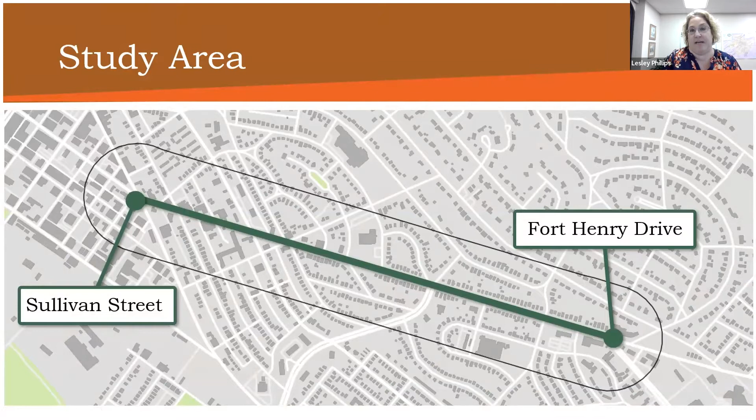For the key findings, the project team spent a considerable amount of time and effort to better understand East Center Street and some of its needs. Here are some of the key findings.

The traffic data also shows that actual vehicle speeds exceed the posted speed limit even during rush hour. Along this corridor, TDOT does an annual count at one location, just collecting traffic counts. But the City of Kingsport went out at the beginning of this study after school was back in session, to make sure we captured accurate data, and they did counts at 3 locations: on the 4-lane section, in front of the Renaissance Center, and the 2-lane section at Dale Street. The City of Kingsport counts go for a whole week, collecting speed, type of vehicle, and a lot more data.

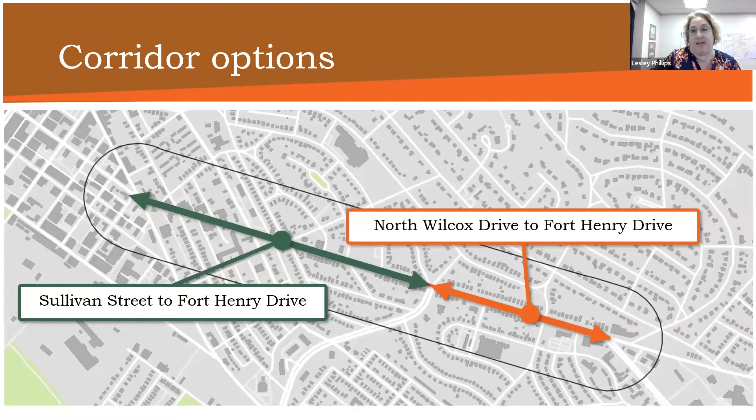So the corridor options. Listening to what you told us, what we saw in the data, and our own observations, the project team developed several different ideas for addressing the issues and opportunities on East Center Street. Originally the plan was for the consultant to give us 3 scenarios for the whole corridor from Sullivan Street to Fort Henry. When we got out here doing the site visit, they quickly saw how different the sections operate, so it was their idea to give us options on 2 different sections that the city can mix and match if they choose.

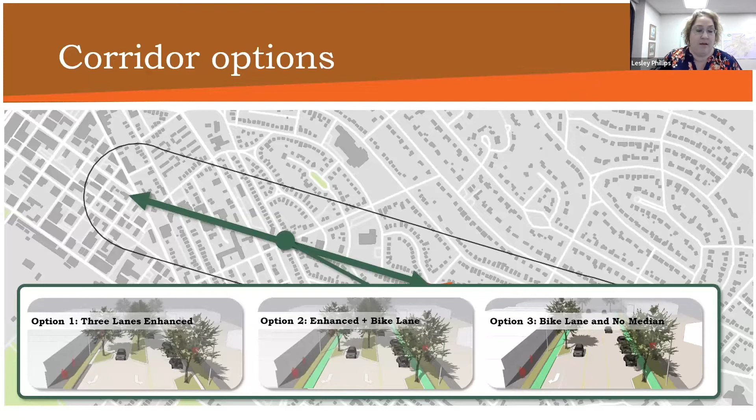So they provided options for East Center Street from Sullivan Street to Wilcox Drive, which we also call west of Wilcox. And then also from Wilcox to Fort Henry, or what we call east of Wilcox.

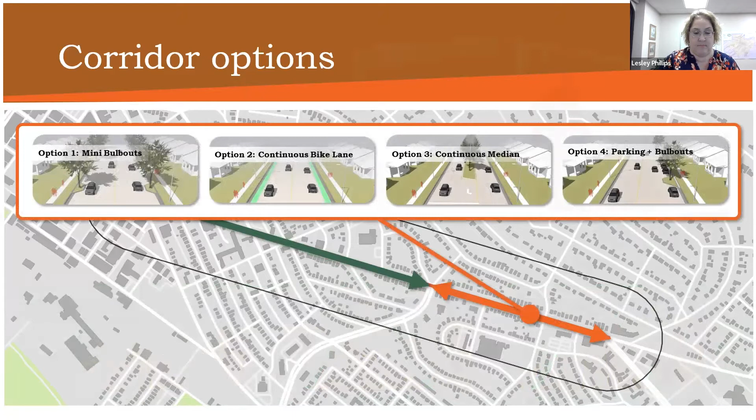In November, we held an open house at the Renaissance Center to share the ideas and get your feedback. We also posted the ideas to the project website and collected responses in an online survey.

Through conversations, map comments, and the survey, you provided a lot of great feedback on our proposed ideas. Here are some of the ideas that stood out the most.

Landscaping and beautification. By far, the greatest amount of positive feedback received on the proposed ideas came from improved landscaping and beautification. Residents who took the survey said they liked ideas that provided plenty of opportunities for trees, landscaping, signage, and other ways to improve the appearance of East Center Street.

On-street parking. Many residents said they liked on-street parking and chose proposed ideas that kept existing on-street parking intact.

Medians and bulb outs. Many of you said you like the medians and bulb outs because of the opportunities they provide for landscaping and traffic calming.

And the bicycle lane, we hear a lot about that. A lot of people make jokes and negative comments, but actually many residents said that they like the existing bike lanes on East Center Street and want future designs to keep them.

So in just a minute, we'll take a look at the preferred vision and recommendations. But first, quick reminder, use the Q&A button to submit your questions while they're fresh on your mind.

And now I'd like to ask Kevin Tilbury from Kimley Horn to join me to share the recommended vision for East Center Street.

Thanks, Lesley, and I'd echo my appreciation of you joining us today. Thanks for your time. We're excited to share the fruits of your labor and sort of helping us create a vision for Center Street.

So we developed the options. We went out and presented them to you. We got your feedback, and this is the recommended plan based on what you told us.

A couple of points I'd like to make about the vision: there are three things we really tried to do. As Lesley mentioned, the consistent feedback we got from everyone is let's make Center Street a more attractive place. It's one of our important gateways into the city, and let's make it look really nice. So we tried to create plenty of opportunities for landscaping and for placemaking, so if someone wanted to have a cafe with outdoor seating, or a place to gather, or opportunities for trees, all that sort of thing.

As Lesley mentioned, our data and analysis showed there's a bit of a speeding issue, just because of the way the road is designed. So we tried to make recommendations that would encourage more appropriate motor vehicle speeds consistent with the posted speed limit. There's also a lot of pedestrian activity in the corridor, and we wanted to create a more pleasant, comfortable, and safe experience whether you're driving, walking, or riding a bike. We want to make it a nice place for you to be, which would hopefully become a place for investment, with more development and businesses coming into the area.

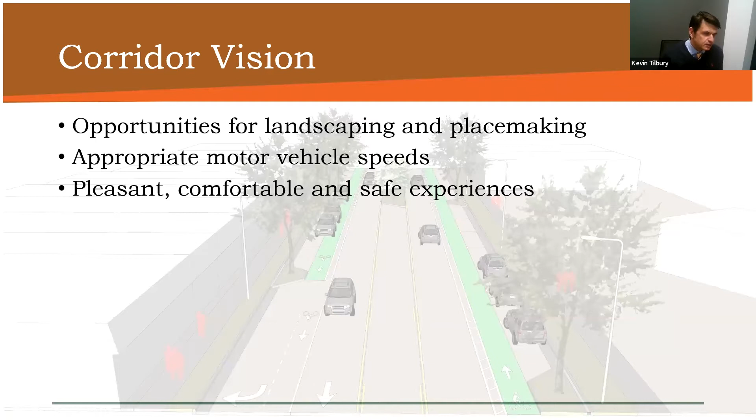So with that, let's dive in and show a little more detail. As Lesley mentioned, we looked at different options for either side of North Wilcox Drive on East Center Street. This is the section from downtown heading east to North Wilcox Drive.

Right now that's currently what we call a 3-lane road, with one travel lane in each direction and a center turn lane. Our vision does not change that. It keeps that same general configuration but adds several enhancements.

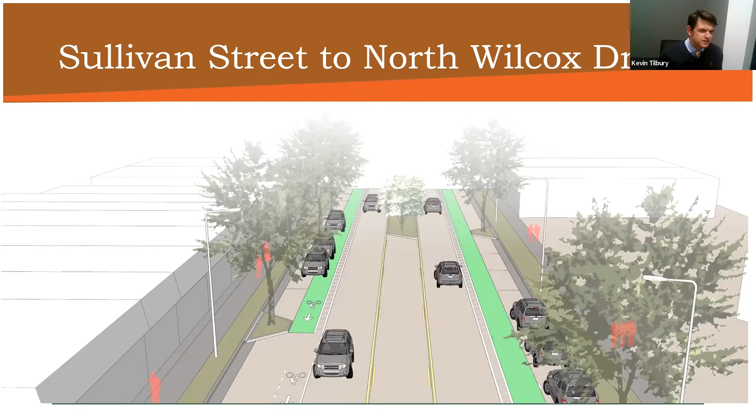So a couple of things are that we installed medians or traffic islands in that center turn lane, which has several benefits we'll get to in a minute.

We also, where there's currently on-street parking, didn't take away the parking, but in certain strategic locations we put bulb outs, which jut out into the on-street parking, and that has some benefits too.

And one of the things Lesley mentioned is we heard from you that a lot of people actually like the bike lane on Center Street, so we did not take it away. We kept it there as well.

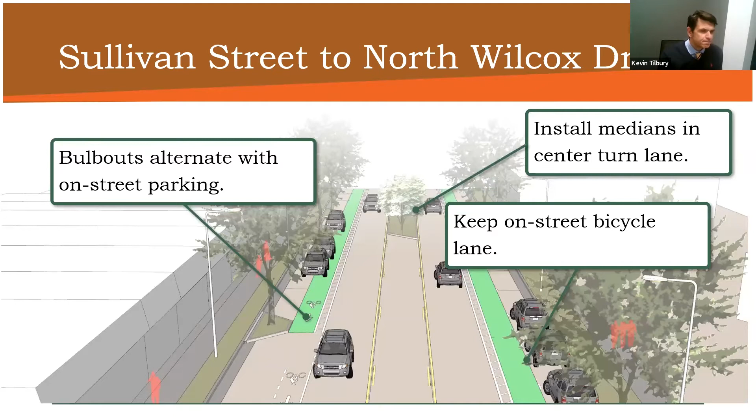So that's the overall vision west of North Wilcox, and then heading the other direction from North Wilcox out to Fort Henry Drive, heading further east. Right now, that's 4 lanes, so 2 lanes in each direction. Again, we didn't change that general configuration, but we added some enhancements.

One of the things we heard is that people like the shoulder that's in place because it can be used for pickup, drop off, or parking. So we didn't fundamentally change the shoulder, it stays in place in most locations, but then we added mini bulb outs that go out into the road, and those provide some benefits we'll get to in a minute.

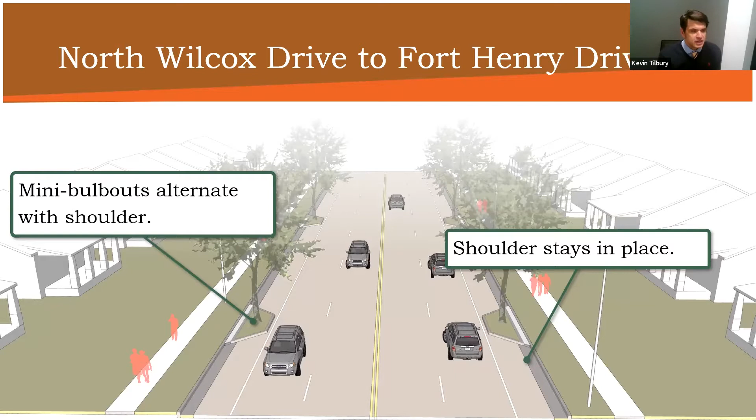And then in other locations on that section, we would transition away from the shoulder, and then create an opportunity for a median in the center of the road. If you go to the next slide, Rachel, it'll highlight that.

So here, in some sections, we keep the 2 lanes in each direction, but they would shift out to the side of the road. And in the middle, we could build a raised landscape median, and then at major intersections we would put in a turn lane.

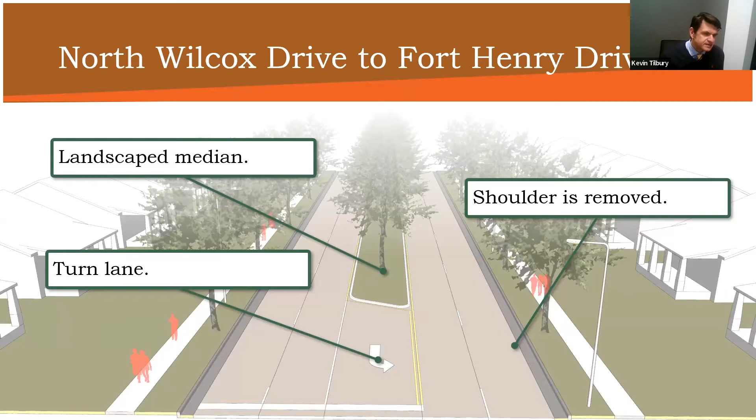So let me take a few minutes and describe why it is that we did that. I think one of the most important things we heard from you all is that landscaping and beautification was really important. So we tried to create a design that would create plenty of opportunities for additional landscaping.

That can happen in the medians installed in the center turn lanes. They're wide enough that you could install smaller trees or shrubs or other types of landscaping, signage. And the same thing on the bulb outs, they would provide enough space that if you wanted additional landscaping there, you could.

If it's adjacent to a restaurant or a building that wanted to become a restaurant, you might even be able to put in some on-street outside dining too, if you make the bulb outs large enough.

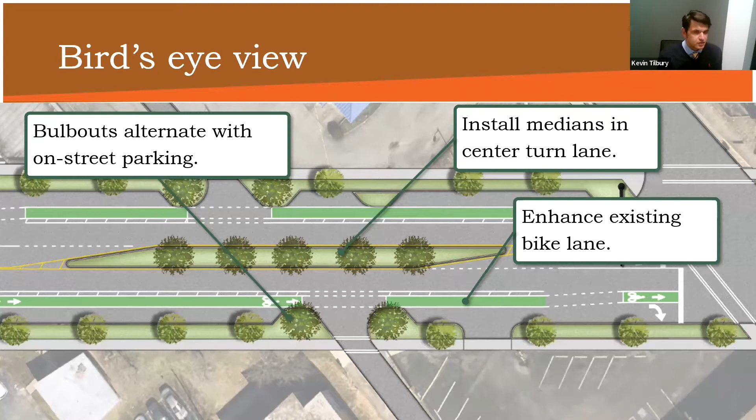If you go to the next slide, this is just another illustration of where all those things could happen. So we really tried to provide a lot of opportunities. In a minute, we'll show you where you can go online and see the full plan and all the locations where we proposed this to happen.

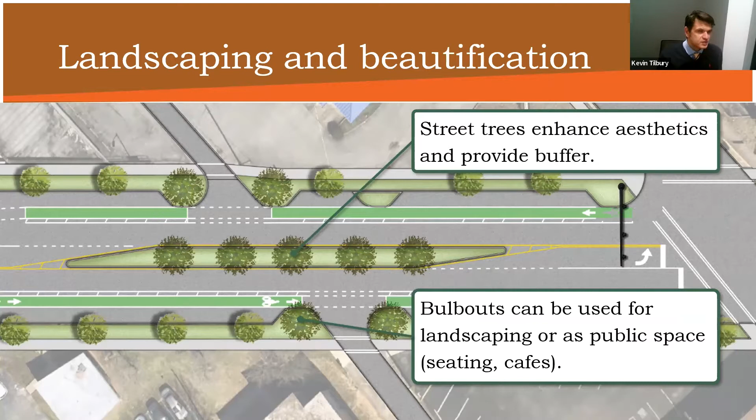A couple of other things we heard is that we wanted to slow down cars and make them move at appropriate speeds. So the design achieves that in a couple of ways. If you go to the next slide, Rachel, we can explain. First, I would like to point out too...

One of the things we heard is that right now people cross the street in random locations because there are certain stretches of the road that are pretty long without any marked or designated crossing. So we've made some specific recommendations to build some crossing locations, where we would get those bulb outs and the median to work together to create that crossing location.

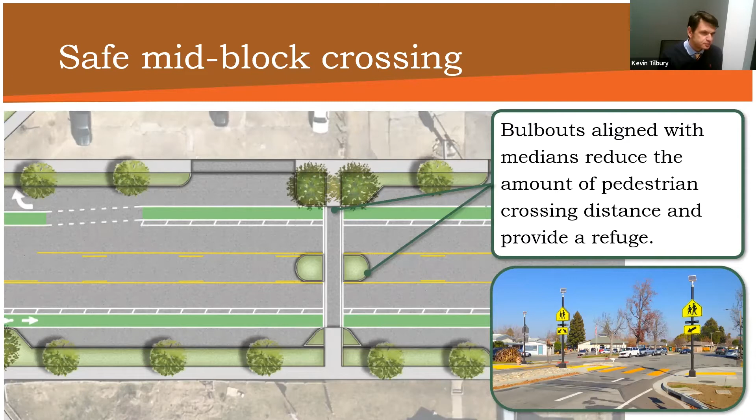You go to the next slide. So one of the things too, again, that we heard is that at certain times, motor vehicle traffic could exceed the speed limit, and so we tried to introduce some very subtle ways of calming traffic so that it would move at appropriate speeds. One of the ways we did it is through what's called horizontal deflection, where we narrow the road.

We use design elements to narrow the road down, which will naturally cause people to slow down. You can see where we go from where the on-street parking is to where the bulb out and the median is, the road narrows. That's going to create that horizontal deflection and calm traffic.

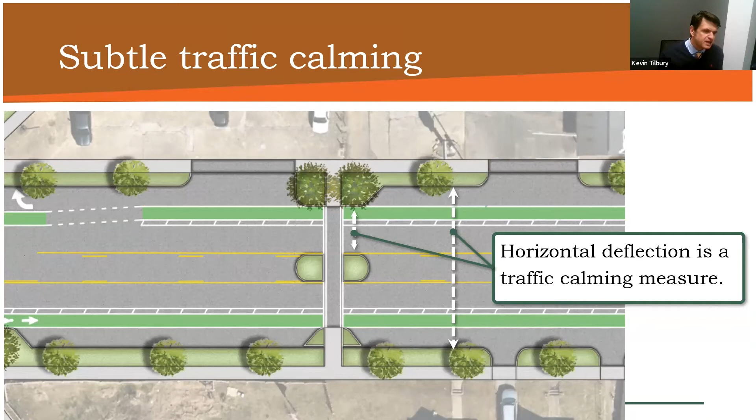The other way we did it is that you'll recall we talked about providing a median alternating with bulb outs. If you go to the next slide, Rachel, we can illustrate. So you can see on the left, a bulb out, and then further to the right, a median. In order to make those two things happen, the road has to shift a little bit.

And that's a very subtle way of calming traffic too. When you introduce that subtle shift, it's going to calm traffic. So that's another way that we try to make the corridor more people friendly while still moving traffic at appropriate speeds.

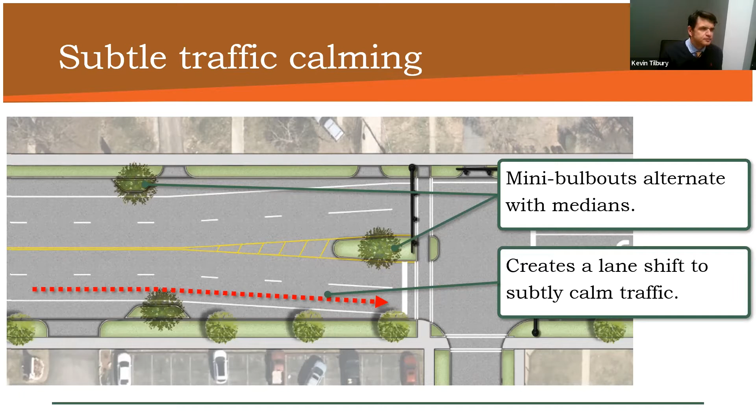We heard from a lot of you about the merge. Essentially, once you get past traffic heading in from Fort Henry into downtown, past the signal at Wilcox and heading past the Renaissance Center, the lanes go from 2 to 1, and sometimes vehicles will speed to try to get first in line to beat that merge.

One idea we have to fix that is to make the merge happen right at the intersection of Wilcox Drive. So the outside lane, coming into downtown, would be right turn only there at Wilcox and Wabash, and it peels off, leaving only the inside lane to continue on. The merge would happen there instead of further down towards the Renaissance Center.

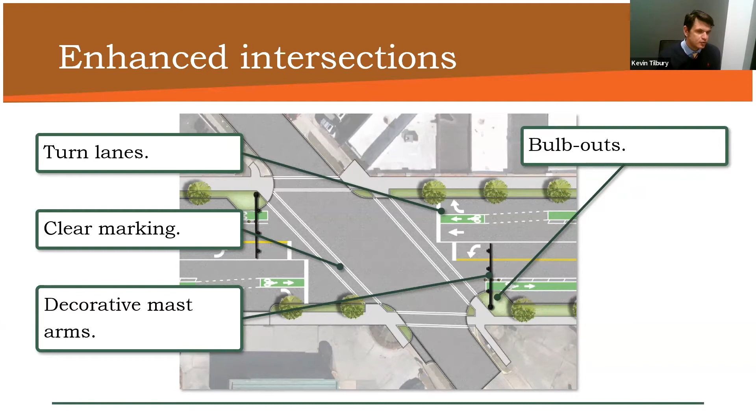We're trying to make the corridor nice overall for people who want to walk, bike, or even drive. But the other reason we're doing it is that we want to create a place where businesses will want to invest and where people will want to go and visit.

So we came up with a vision for land use. What we found is that further east from Wilcox out towards Fort Henry Drive, that section of the corridor is generally doing pretty well. The intersection at Fort Henry has a pretty strong commercial node, most of the homes along that section are pretty strong, and there are medical service office uses on the south side doing pretty well. So we want to reinforce all those things—we don't want to fundamentally change them.

But once we get further into downtown, that area really has potential to change. It's in a great location, in between downtown and the Renaissance Center, two tremendous assets we want to take advantage of. So our vision for this section of the corridor is what we call a culture corridor. We're not going to fundamentally change the scale or nature of development there, but we're going to create an environment where new businesses would want to invest.

We're talking about things like local retail, restaurants, nonprofits—things that would benefit from being close to the Renaissance Center. So if you wanted to attend an event at the Renaissance Center or downtown, you could take a short walk along this section of Center Street and visit a restaurant, or maybe a gallery. Creating opportunities to adaptively reuse a lot of the buildings there is what the land use vision would be.

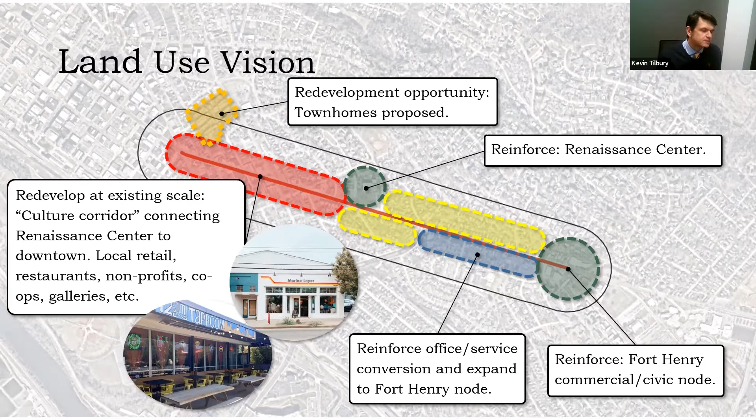So that's an overall, 10,000 foot view of what the vision is for Center Street. In a minute, we'll show you where you can go online and look at all the details and see the report. But first, we wanted to stop and give you another polling question.

We want to ask what you thought about the preferred vision. First, think about the section we presented first—from Sullivan Street to Wilcox Drive, into downtown, where it's currently 3 lanes. What did you like most about what we presented in the preferred vision? You can select up to 3 of the options on the screen: is it the landscaping and beautification, or do you like the traffic calming aspects of it?

The pedestrian safety enhancements, some of those intersection improvements that we talked about, the fact that it has bicycle lanes, that we're keeping on-street parking, access management. One of the things we didn't talk about in detail but is part of the plan is that we would consolidate some of the driveways and turn movements to clean those up a little, to make it easier for people to drive up and down.

So we'll just take a minute and let you vote and pick the one, or three rather, that you like most about the vision.

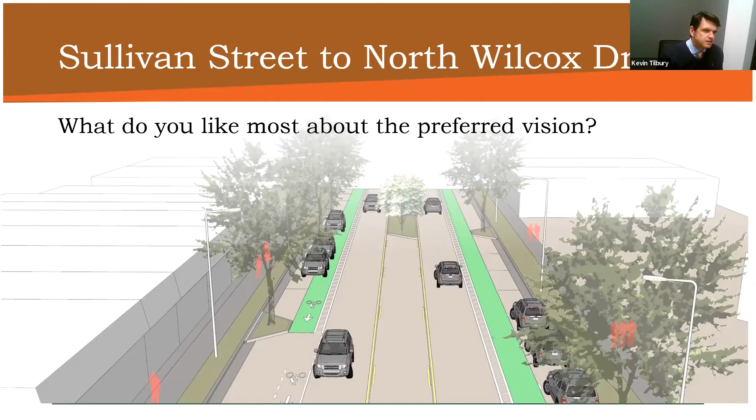Thank you. Now let's think about that other section of the corridor, from Wilcox further east to Fort Henry Drive. That's the section that's currently 4 lanes, and the vision talks about putting in mini bulb outs in the shoulder in some places, and in other places replacing the shoulder with a median or traffic island running along the inside.

So for this section, tell us what you liked about that. Is it the opportunity for landscaping and beautification? Is it traffic calming aspects, some of the intersection improvements, the on-street shoulder, or something else? We'll give you a minute or two to respond.

All right, how did we turn out, Rachel? So landscaping and beautification, some of the intersection improvements, on-street shoulder, and then some people said something else. Interesting. Okay, well, thank you.